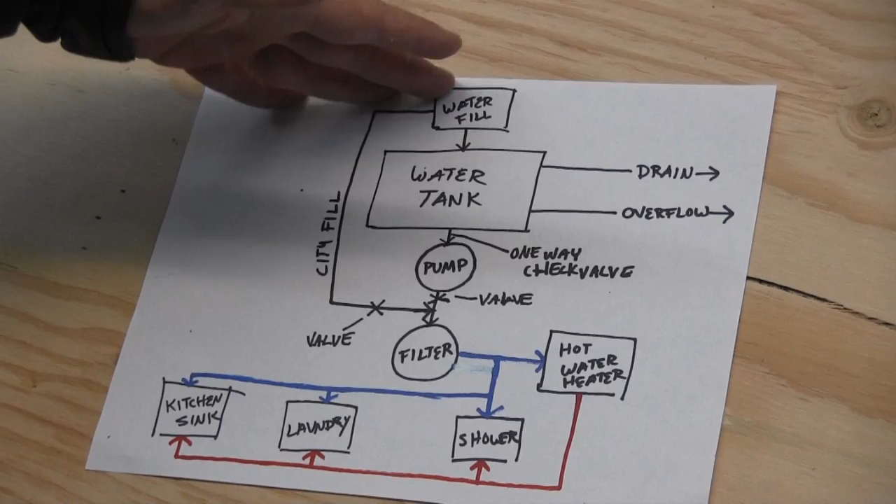You have a water fill hatch on the outside of your tiny house, and then inside you have a water tank storage. This is a 42-gallon tank that we put in here.

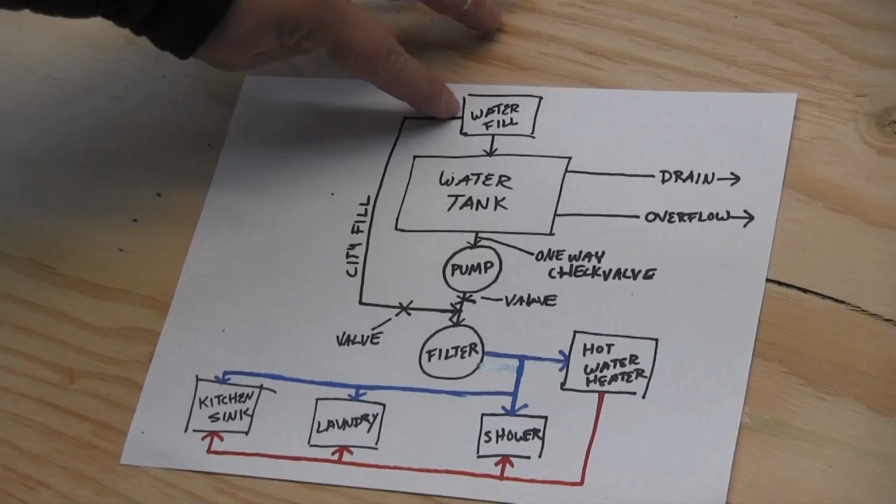On this water fill hatch, we also have another line that comes in for basically a city fill. If you wanted to hook this up to water all the time, like you were parked next to somebody that had a well pump and a pressure tank, you could set this up and bypass the water tank that's on board. So it's set up both ways.

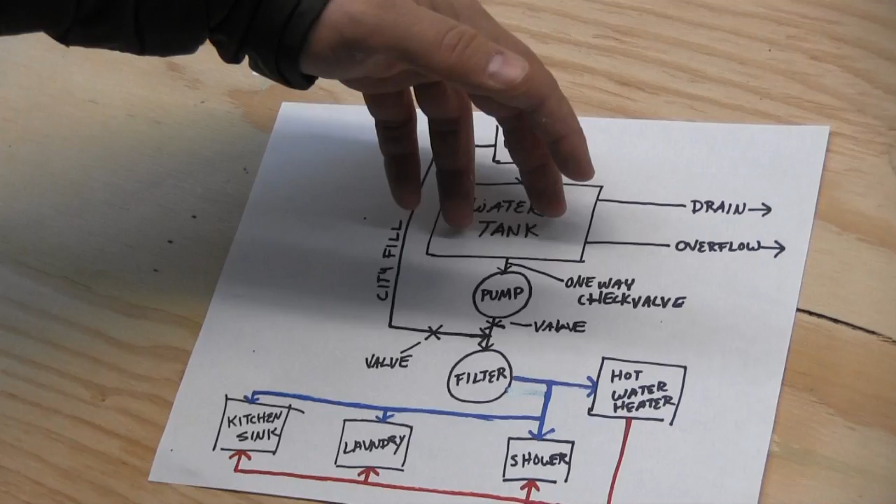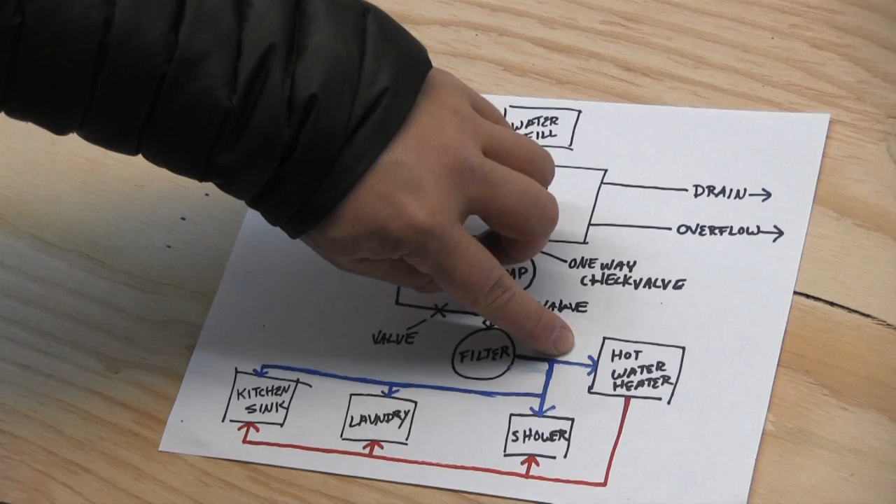So you have a water tank, and the water comes into your pump. It has a one-way check valve, so the water can only go one way. As it comes out of the filter, you'll have your clean water coming out, and then you'll have a line that goes and feeds your hot water heater, and this supply line which feeds the shower, the laundry, and the kitchen sink.

Hot water heater, you'll have your hot water that comes out of there and supplies everything else, your shower, your laundry, and your kitchen sink.

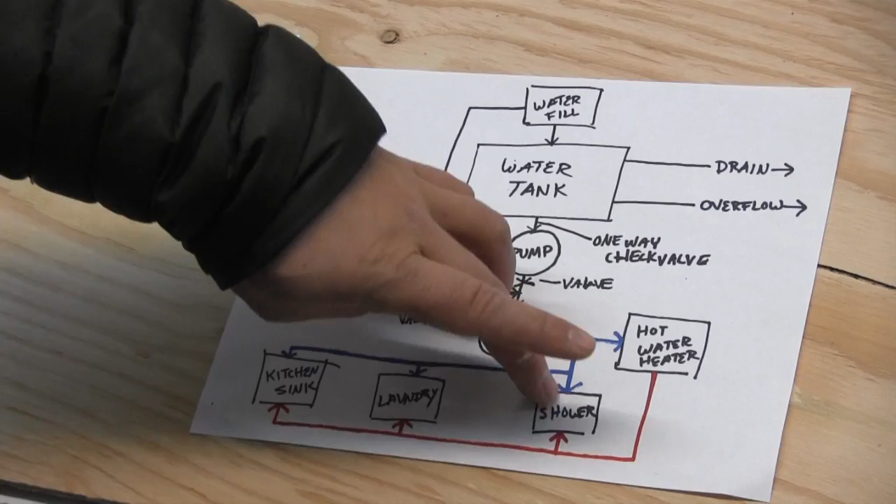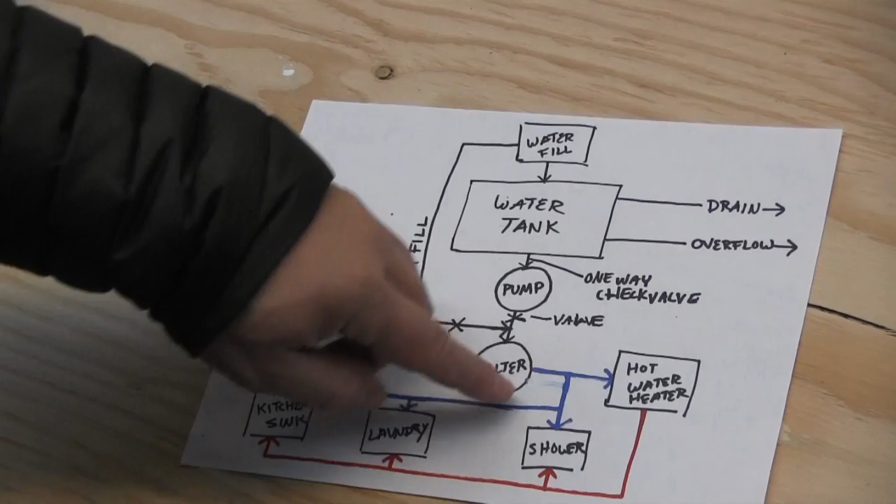We put in a couple of valves, so if you were to hook it up, you can shut a valve here on the back side of the pump, open this valve, and it'll force water through the filter and work exactly like a system would in a normal house.

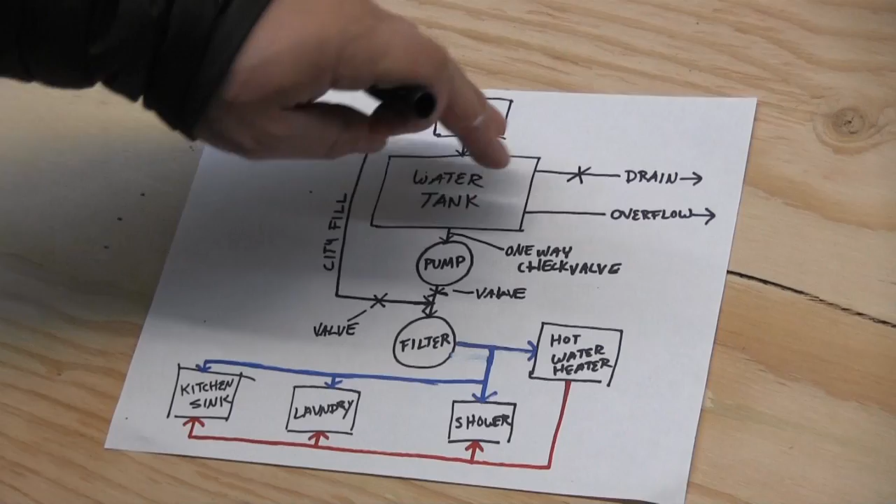There's a drain, and on that drain there's another valve, so you can drain the bottom of this tank. And then also when you fill it from the outside, you have an overflow so that you know your tank's full.

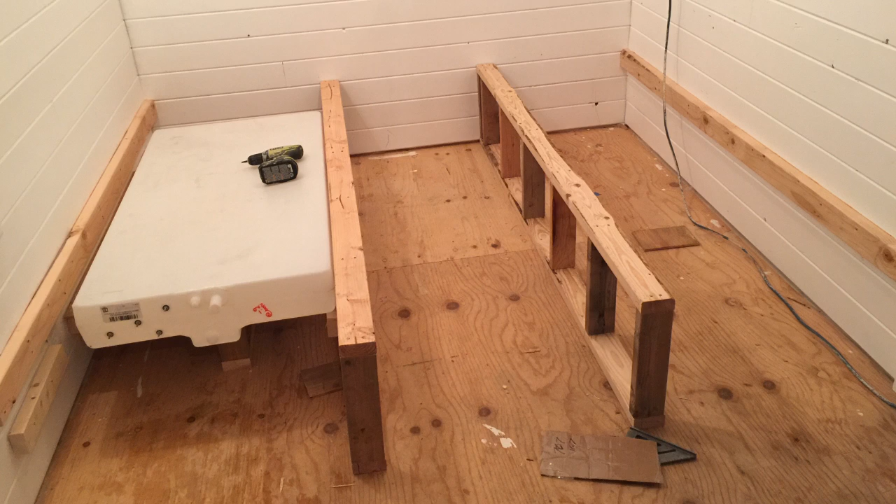The first step is to build a raised floor to put the tank and the P-traps for the shower and kitchen underneath. Because we live in Alaska, those things have to be inside the tiny house - normally you would just put them underneath your tiny house trailer, but we can't do that up here. We did it in such a way that we could maximize the space underneath to create more storage opportunities for the homeowner.

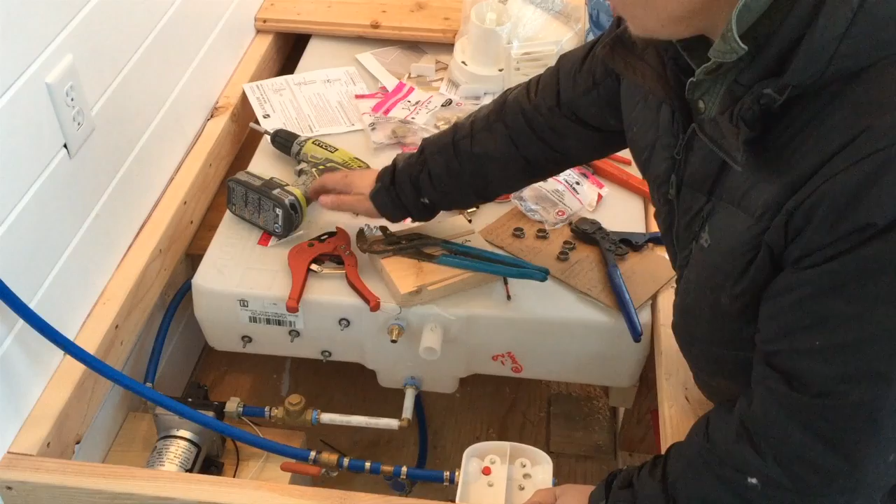First thing is getting all your fixtures set in the right place, and then you can start running some pipe. We have our fresh water holding tank, which is going to be underneath the floor here, and then we're putting in a 12 volt pump, and then we have a filter here. So we're basically plumbing this tank in.

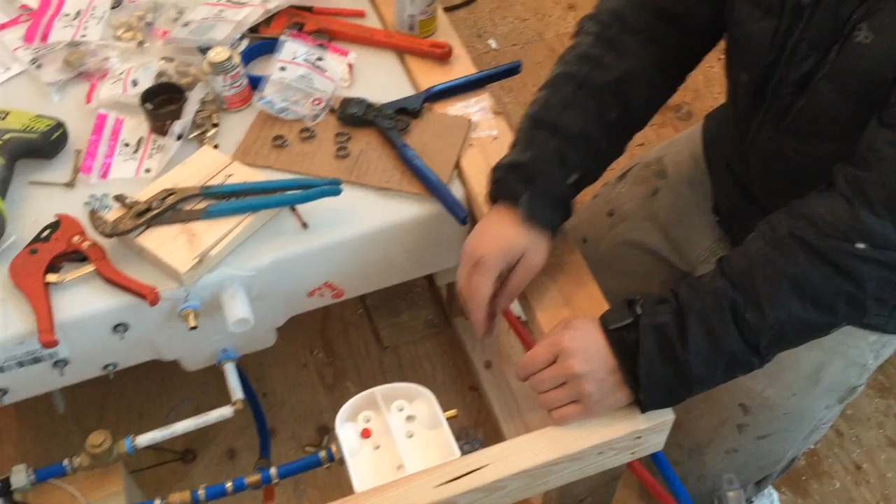We're going to come into the pump. Out of the pump, it's going to come over here and feed this filter, and then out of the filter, we'll be able to feed our hot water heater and all the appliances - shower, sink, washer and dryer. So basically just getting the rough-in done.

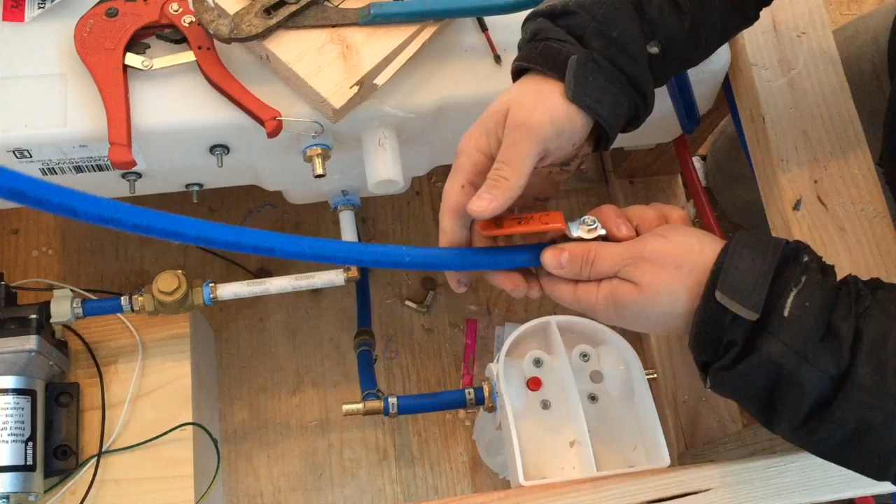Now I just need a T here, and we added in this city water connection, which will actually tie into city water or a well tank.

So the PEX cuts real easy, and then they have these little crimps here, these stainless steel crimps which crimp on, and they're very nice because they're real easy to do. Put it on there, tighten, and that is crimped. Obviously we got to go ahead and finish all the rest of them, but that just gives you a quick idea how quick and easy it is to make a crimp.

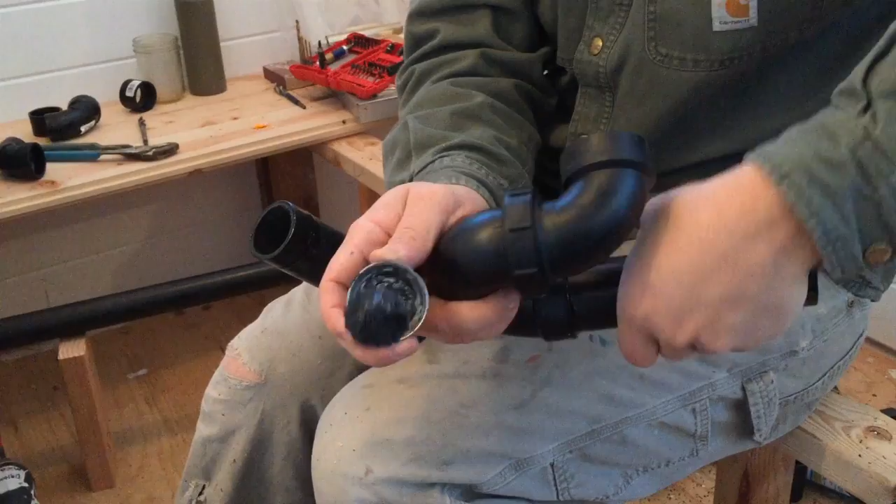I'm going to go ahead and put the shower head in here, and then we got the mixing valve that's got to go in. So we'll get these two drilled out, put them in place, and tie the pipes in.

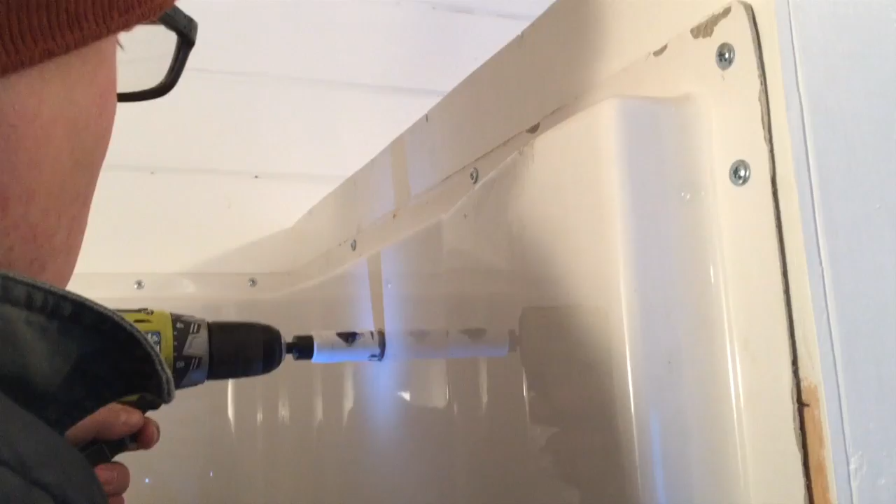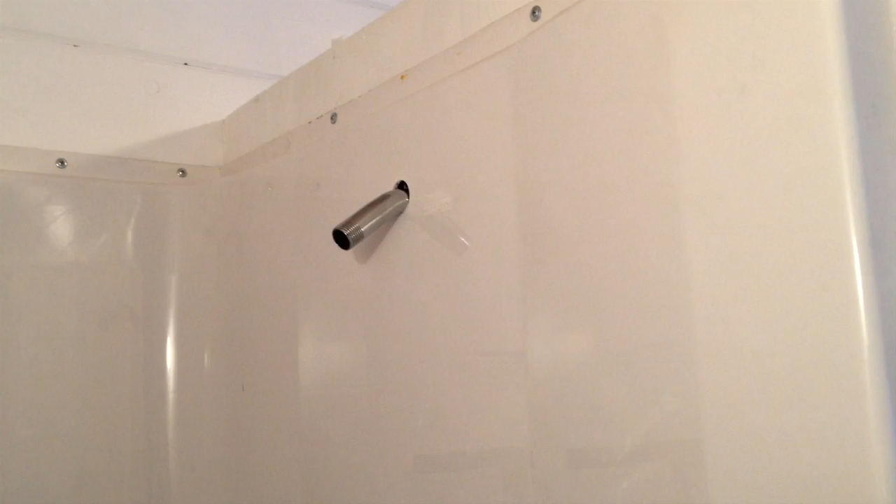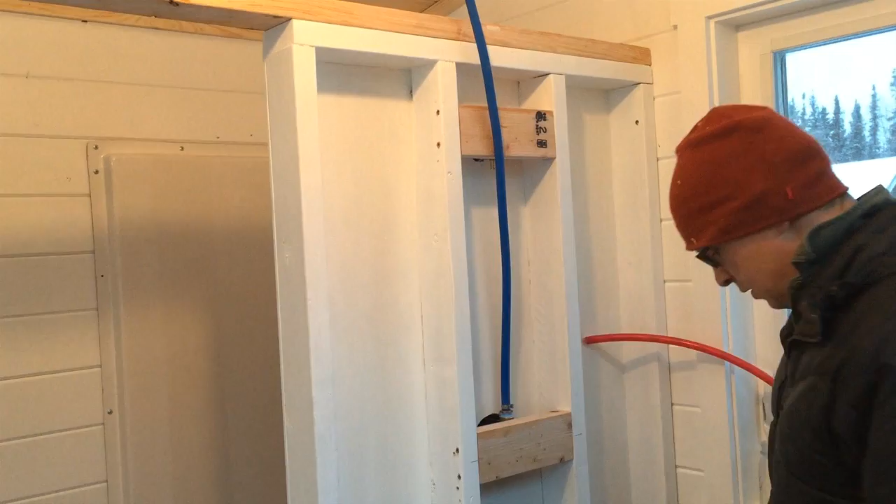Went ahead and mounted it, so now we're going to go ahead and put this through. Now I just got to tie this line in and finish it here, and then I got the hot and cold that need to be tied in. That should be ready to go for pressure testing. You just kind of line it up—they make a tool here for cutting.

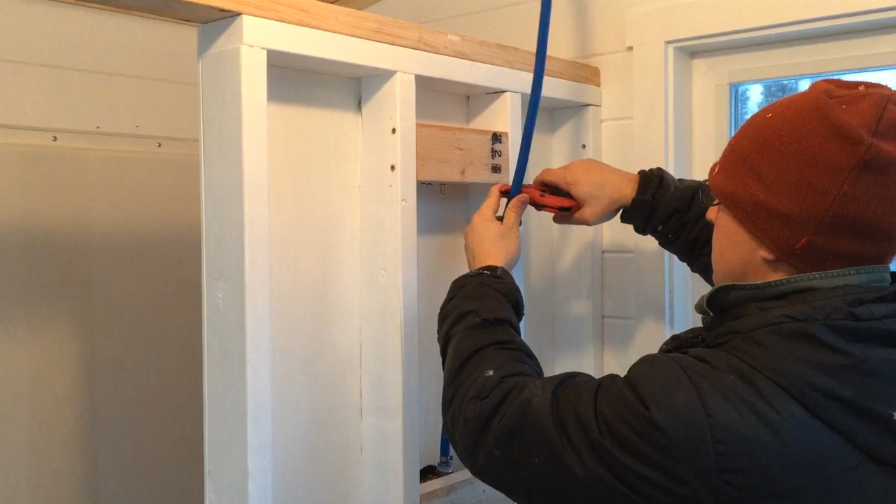Now that is our main line coming from our mixing valve. So you'll have a hot and a cold that comes into the mixing valve, and you'll be able to control what temperature comes out of the shower head. So we got the plumbing done.

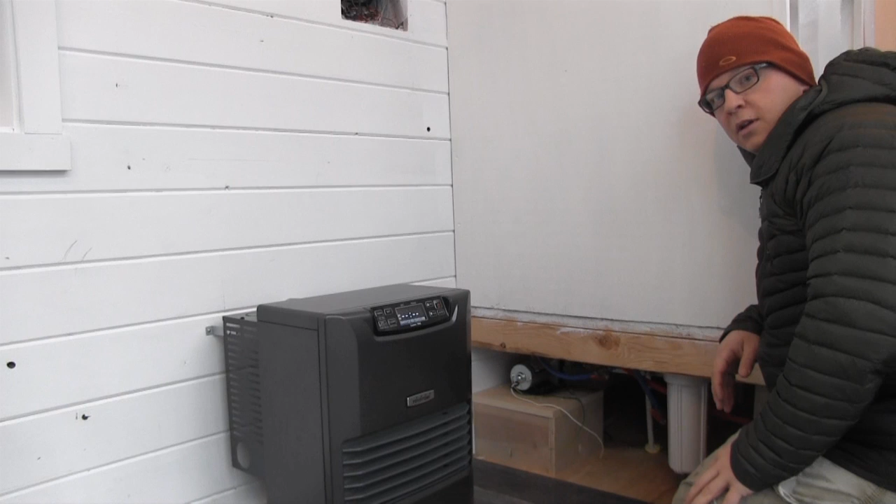I just want to show you a few things about this plumbing we did on this tiny house, how it's accessible, and also if you ever do have a problem with it, it's not something you have to rip the whole bathroom out to fix.

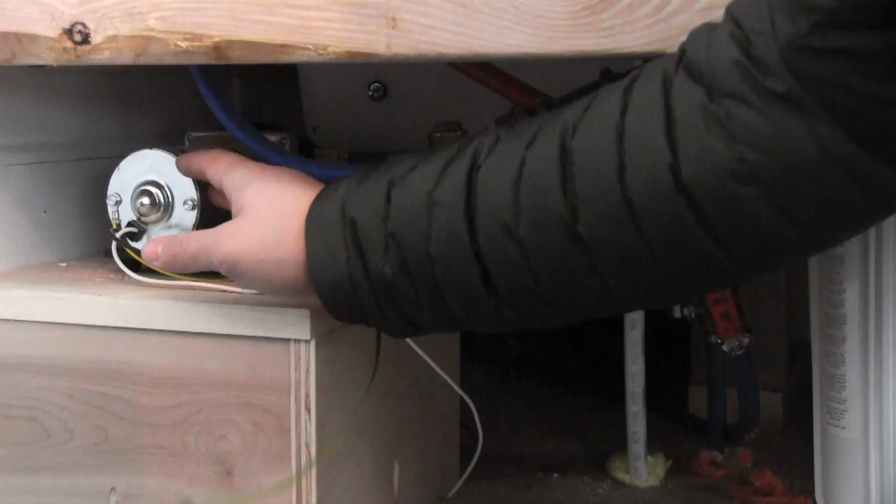So as you can see, we got our water pump here. If this pump ever goes bad, you pull it out, put these fittings back on, and it's that easy. It could take 5 minutes to replace your pump.

We have the filter here, so it's easy. You can come in here, spin it off, replace the filter, put it back on.

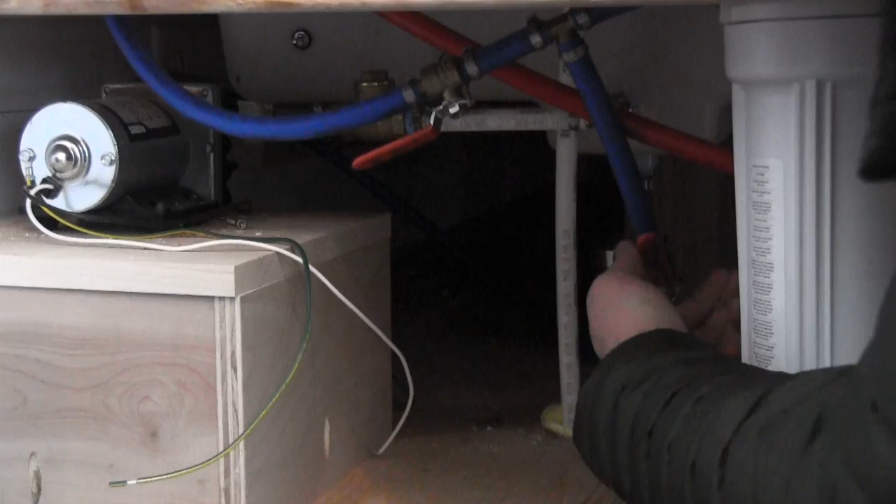We have our city water that comes in here. So if you ever wanted to have your city water on, you would turn that valve on, and the one that comes from the pump, you would turn this one off. Basically it feeds into your filter, works like a normal house. Really simple to do.

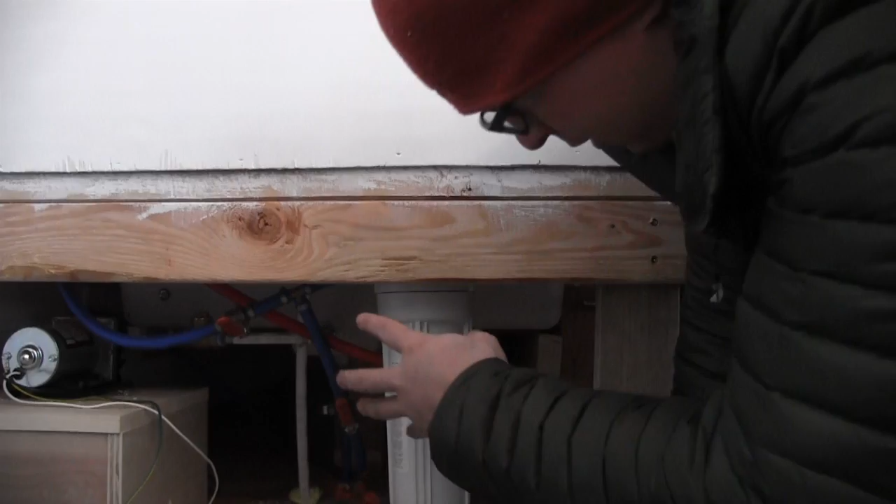When we put this in, I was like, man, what happens if the tank ever goes bad? It should never go bad, but worst case scenario, say something has to be done and you need to get in here and do it. Well, this 2x4 comes off right here, and then you can undo all these plumbing fittings, and that tank will slide completely out of this hatch, and you can get a new one and slide it in. Worst case scenario, I'm just saying, maintenance wise, something to think about when you're actually doing your tiny house.

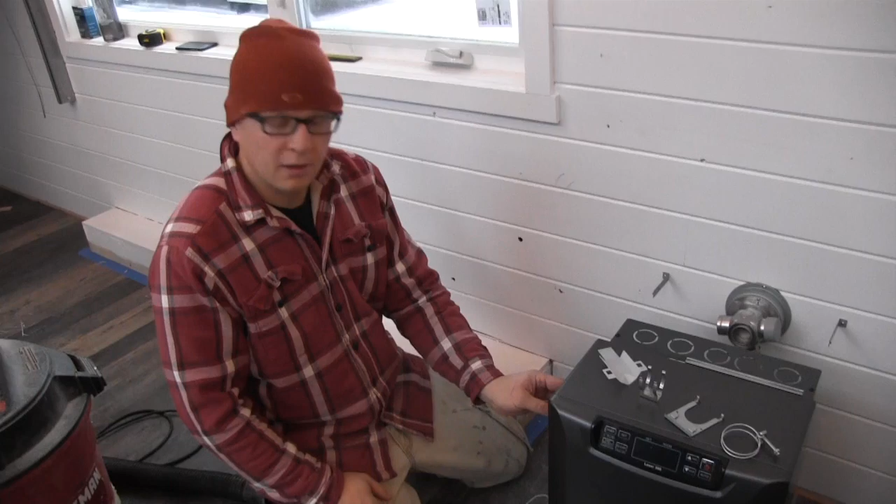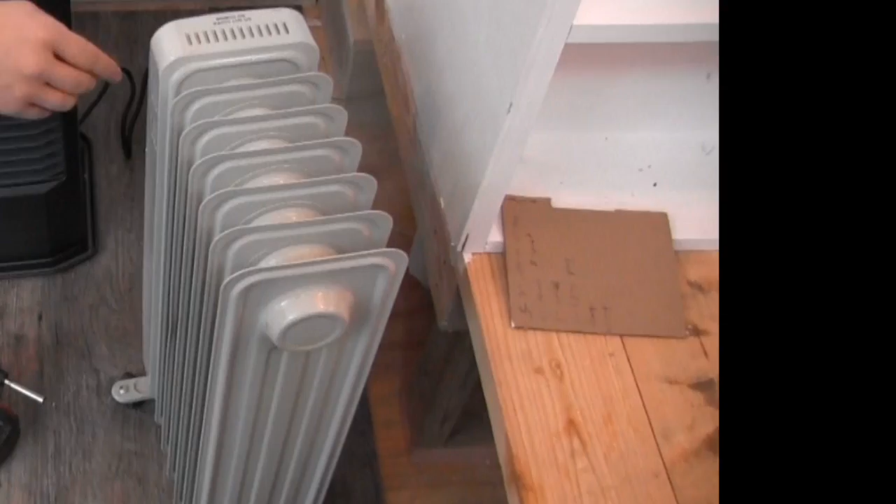Hooking up the heating source for this tiny house. It's a Laser 300 made by Toyotomi, puts out about 15,000 BTUs, and I think it'll work quite well for this tiny house. It runs on diesel fuel. We've just had this little oil electric heater, and this has been going for us doing construction here.

And the last 2 days it's been 30 below outside. It's obviously not 70 degrees in here, but it's keeping it at probably 50 degrees, which I think is quite well for a little electric heater like that.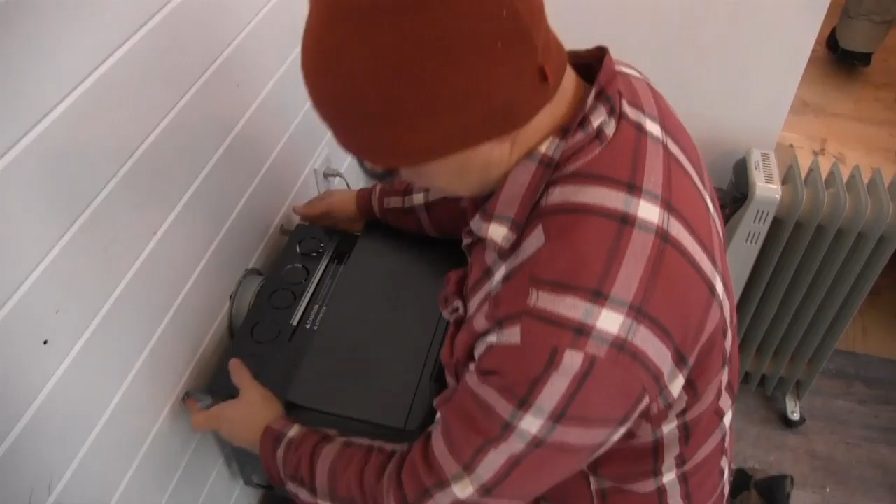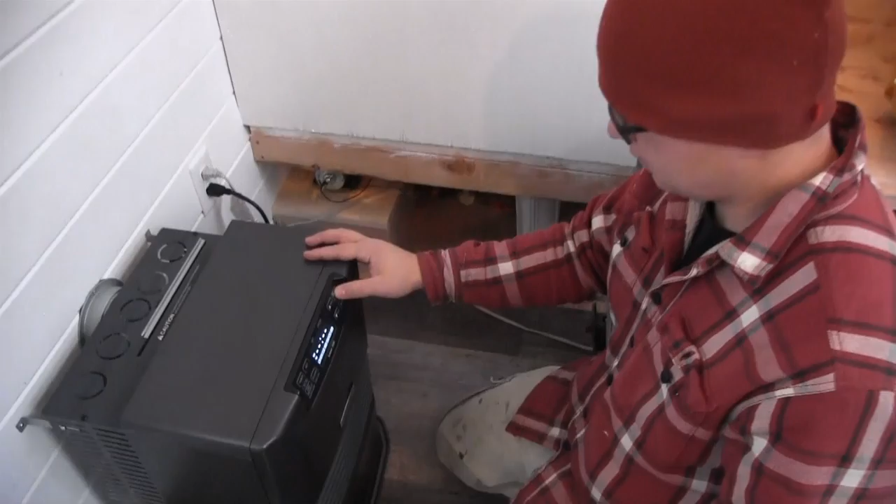But we've mounted this to the wall. The last thing to do, we have to bring in a fuel line right here, and that's just a copper line that comes in and feeds the stove. It's just a gravity fed system, so the tank has to be 16 inches taller than this, and so it'd be nice to have a tank built on the outside, but something that can be removed very easily for transport if you want to take it down the road, but can easily be put back on.